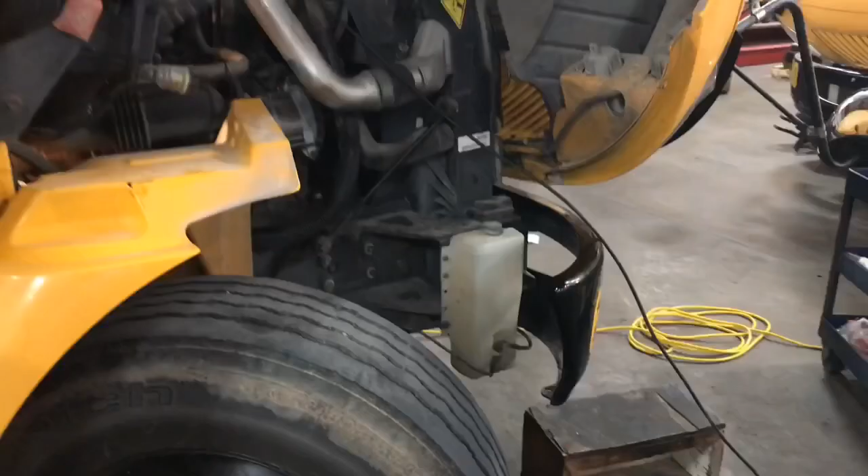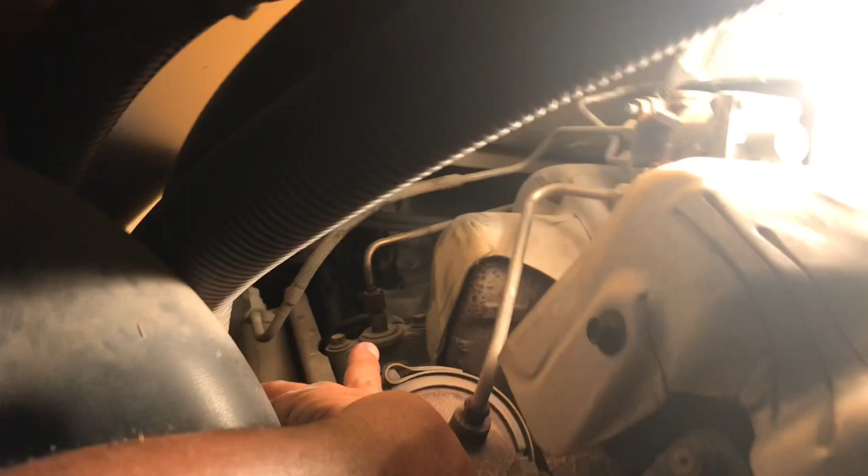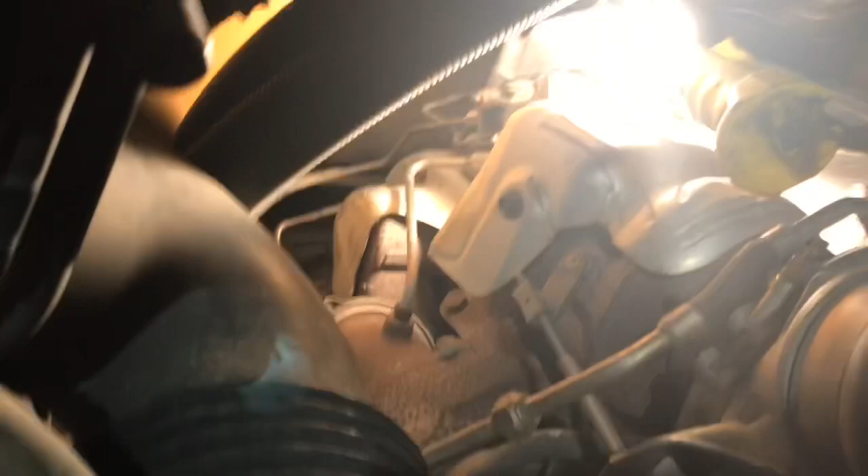Well, guys, this is the unit in question, and this is the 2014 MaxxForce DT, and this down here is the 7th injector. Well, guys, this is the engine that we're having that injector issue with. I can't really show you that well. Let me go ahead and get this air box out of the way. I mean, I can do it without taking that air box, but I want to give you a clearer picture, so let me get that air box out of the way.

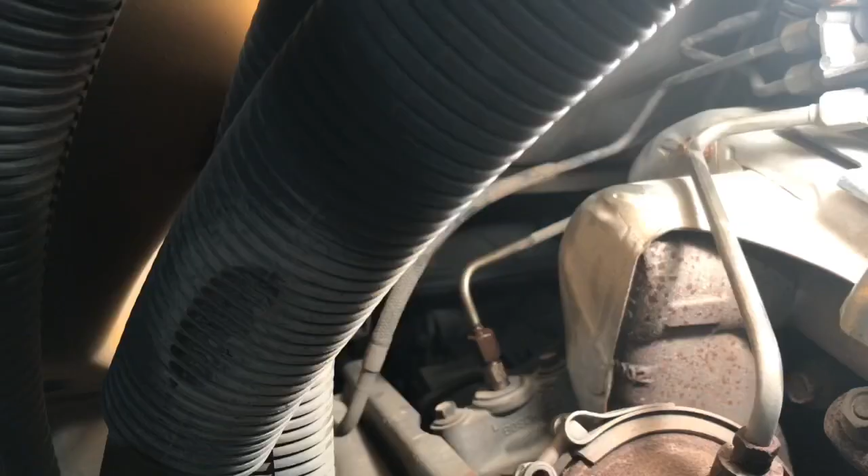Yes, there we go. We've got to go ahead and remove this line. It's a 14mm wrench, and then we'll remove that injector with a 12mm wrench. Once we do that, we'll check and see if this little plate has a carbon buildup in the bottom. If it does, we'll remove this plate, two 10mm, and 2 lines behind it.

You know what? I'm going to show you a trick. You don't have to remove this. If it does have a clog, I'm going to go ahead and clean it up without taking it off, guys. I'll see if I can get the camera in there and show you how they clog up and how I break it apart. So let me go ahead and remove the line and the nozzle. They're on your downpipe right behind that turbo.

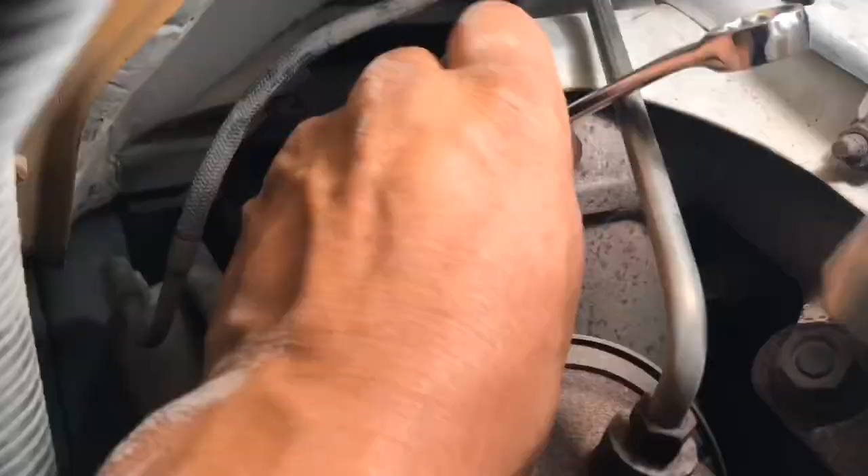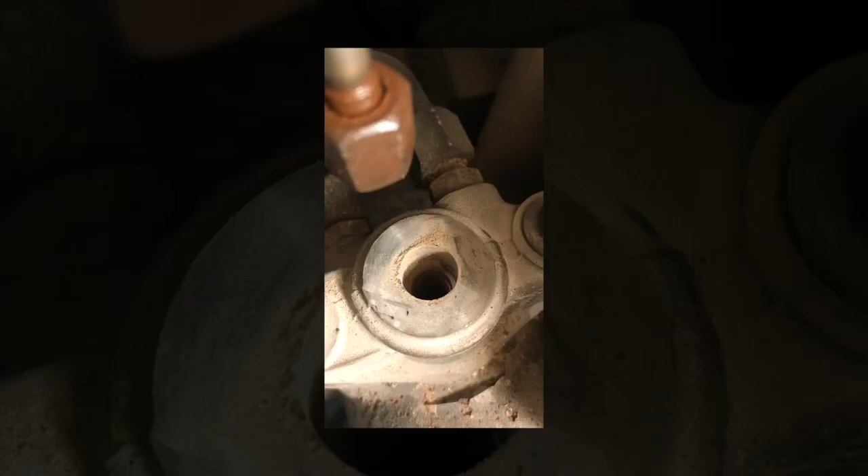Let me see if I can get you a view of that clog or the little carbon cap that I'm talking about. Well, guys, it was a little noisy on that side, so I came over to this side. Hope you guys saw that cap or that carbon deposit.

What I'm going to do now is use a small little screwdriver, and I'm going to poke. Well, you'll see. The screwdriver's not going to go in. I'm going to have to kind of force it a bit, and then it'll just break that little carbon cap, and all I've got to do is clean around it and make sure that I break most of that carbon off. That way, when we actually regen, that injector will spray, and the fuel will somewhat atomize inside that downpipe, and it'll get that DPF filter to the temperature they want it to be at.

So let me show you. It's a little noisy, so I'm going to cut the volume on it, but I'm going to show you in real time how I break that little cap without removing the injector nozzle base. Let me go ahead and get to it.

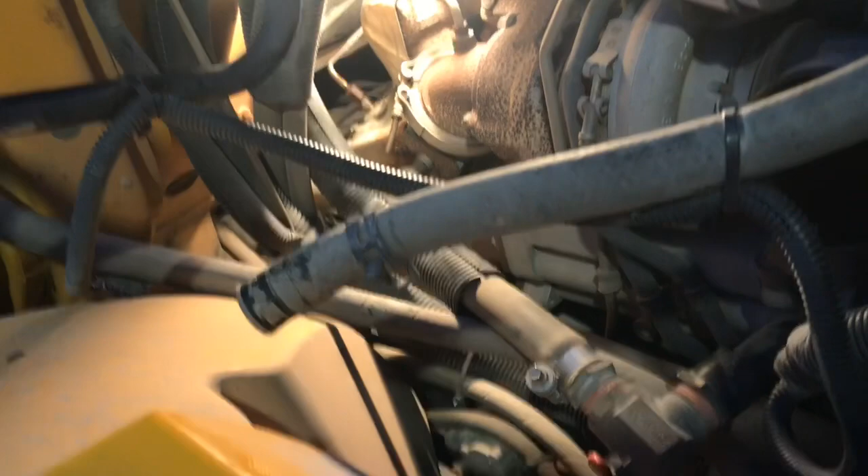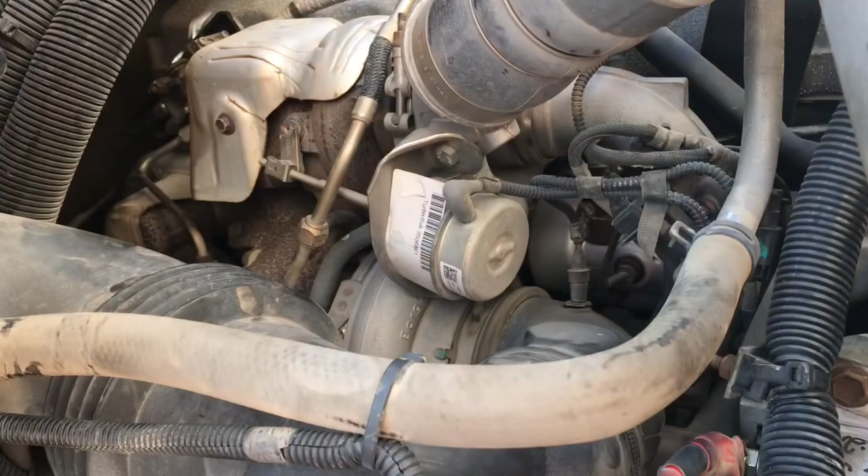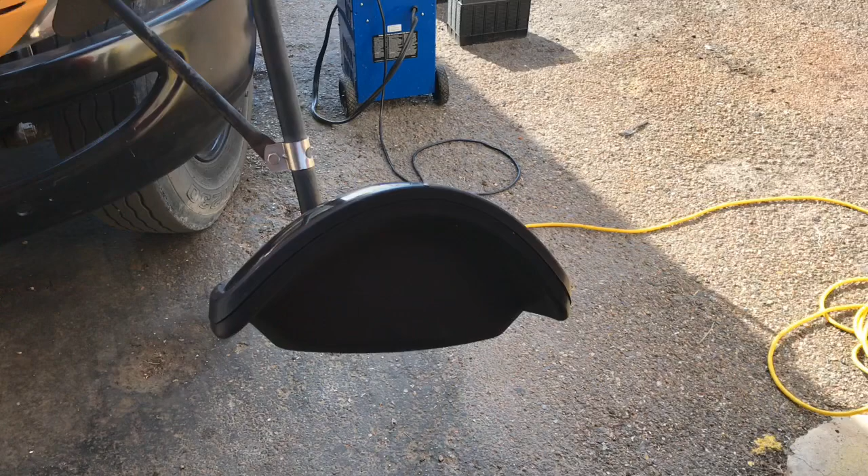There you got it, guys. That's all tight. So let me go ahead and get this air filter back on it and start running that regen. Guys, I have to let the engine run for a little while. The temperature on the engine's got to be over 140 to be able to do a regen on it. So that's why it's running on there.

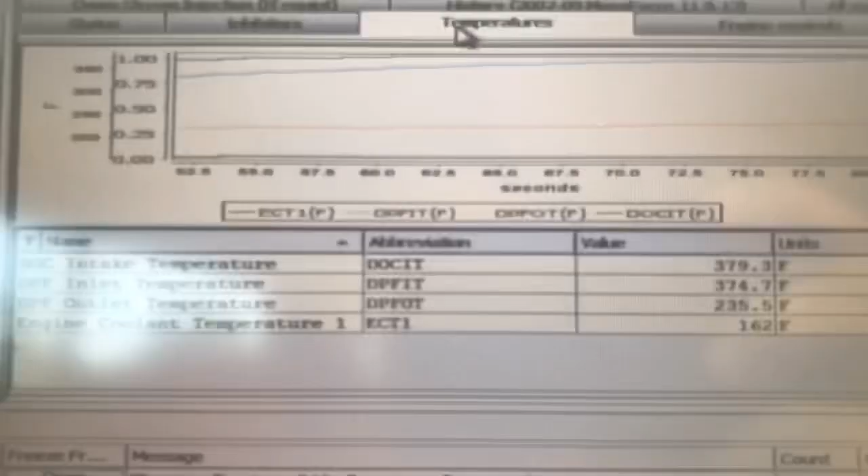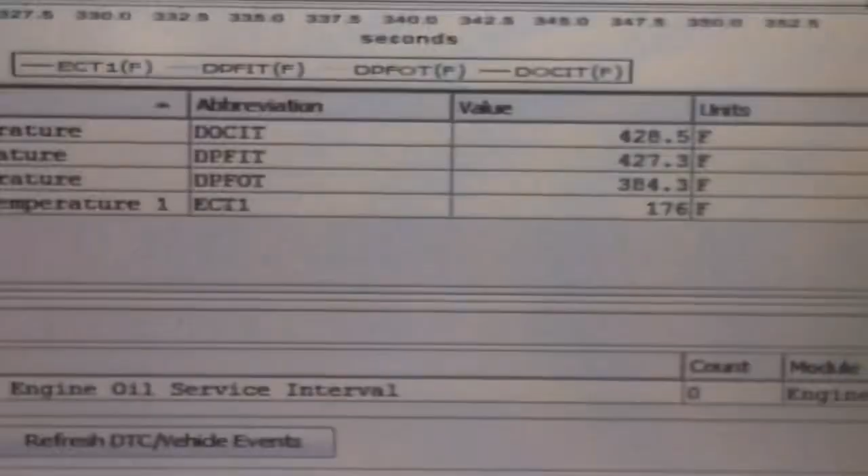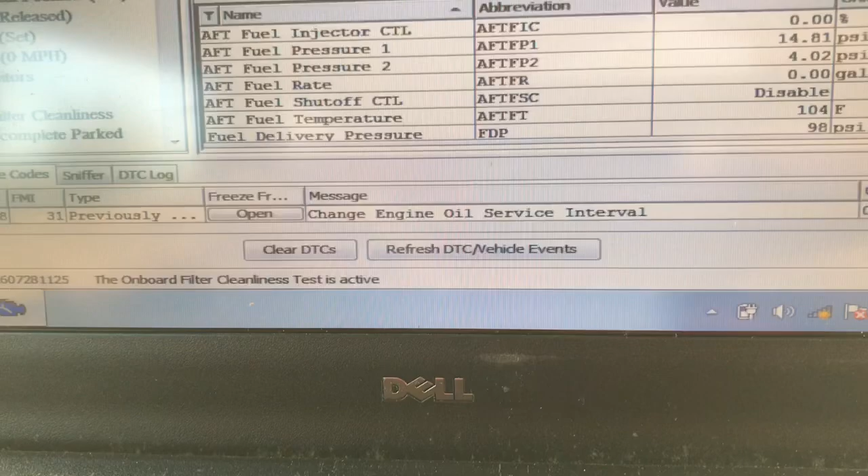Has to hit 500 before the downstream injection begins. So you gotta wait a little bit longer. Temperature is good at 445. We checked the doser injector, it's disabled, and really hasn't done anything. So we have to wait until the temperature rises above 500.

We'll come back to this screen so you guys can see the difference. It'll start using a couple of gallons per hour, and that disable will become enabled. The AFT fuel pressure 1 is going to go to 100 and something, 110, 115. So you'll see a difference. So let me go back to the temperatures.

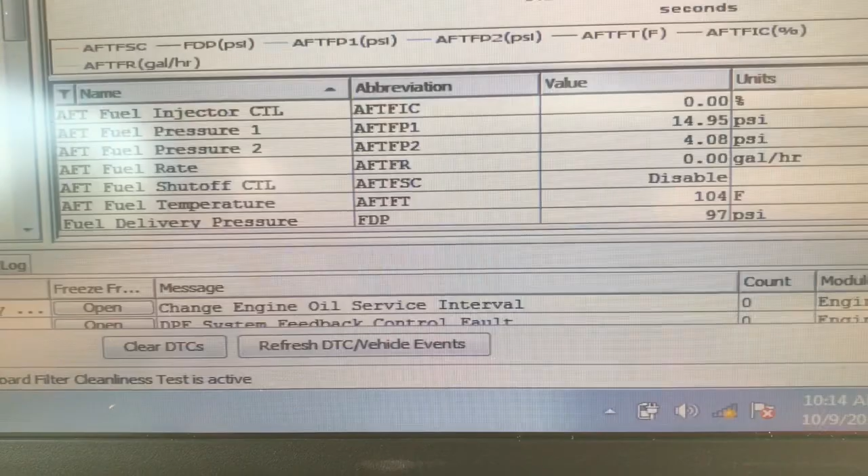Well guys, on this one, this unit is having a little bit of trouble going up on that temperature. It's staying at 455, 456, and it picked up a fault on the DPF system. So on this one guys, I think we're gonna have to replace that little metering valve. Not sure yet, but I'm gonna try it a couple more times. If it doesn't kick in, then I'm gonna stop here, order that metering block, and when we get it, I'll just go ahead and finish this one off.

I hope it is, that way I can show you guys another part for that regen system. So let me go ahead and continue this, and hopefully, well, I hope it doesn't work, so we can see what the metering block does. But if it does, we get it going.

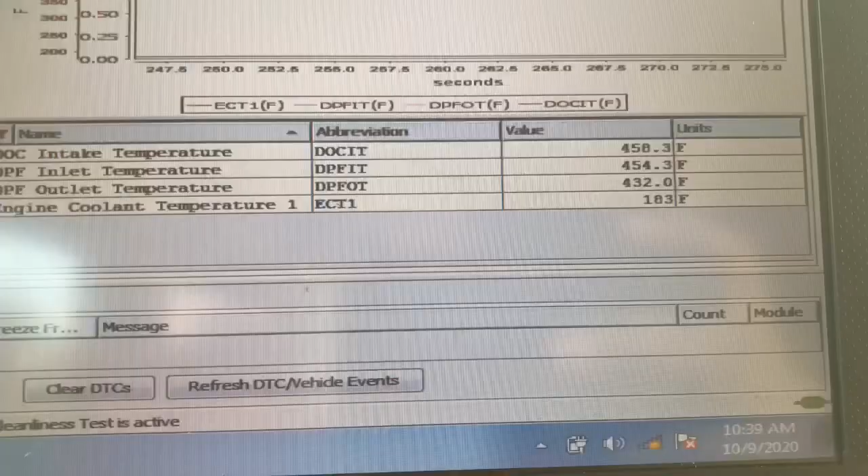Well guys, this one, temperature didn't want to go up. We have a DPF system feedback control fault. I'm gonna have to run a check on this one. I think I already know that it's gonna be that little metering block that's not functioning properly.

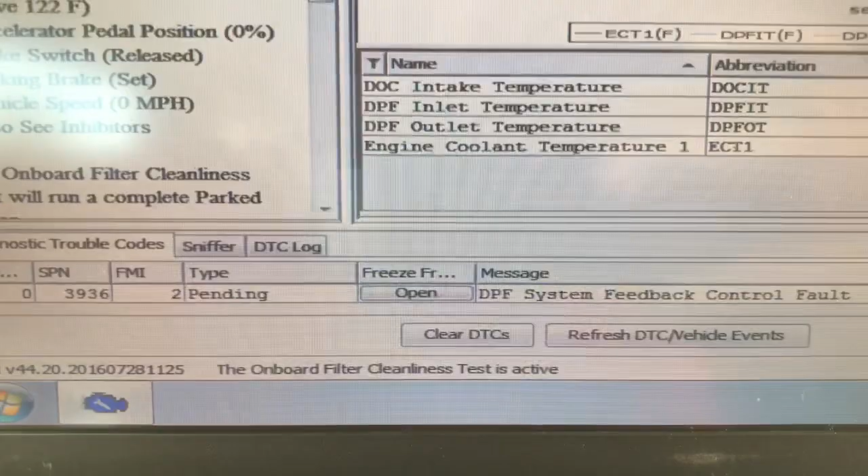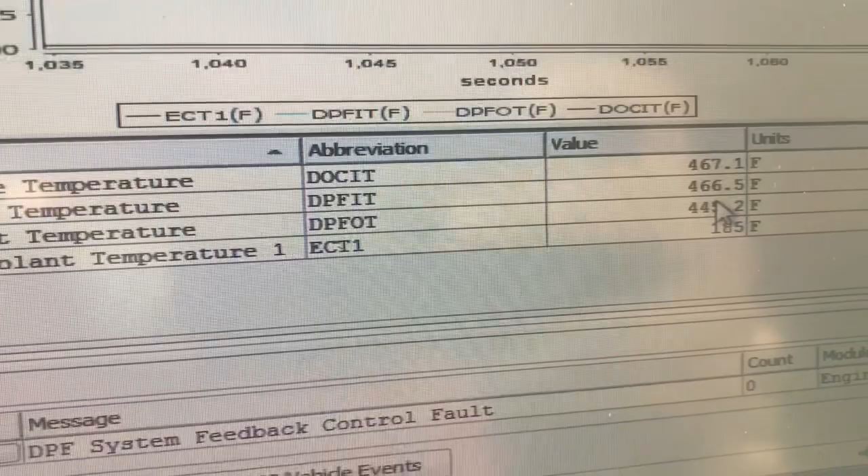When I come back on Tuesday, I got to take those temperature probes out. They're working, I'm just gonna clean off whatever carbon deposits are on there, and I'm gonna see if I can activate that metering block manually with a laptop and see how that functions. If it doesn't work, we're gonna have to order a metering block and get it installed.

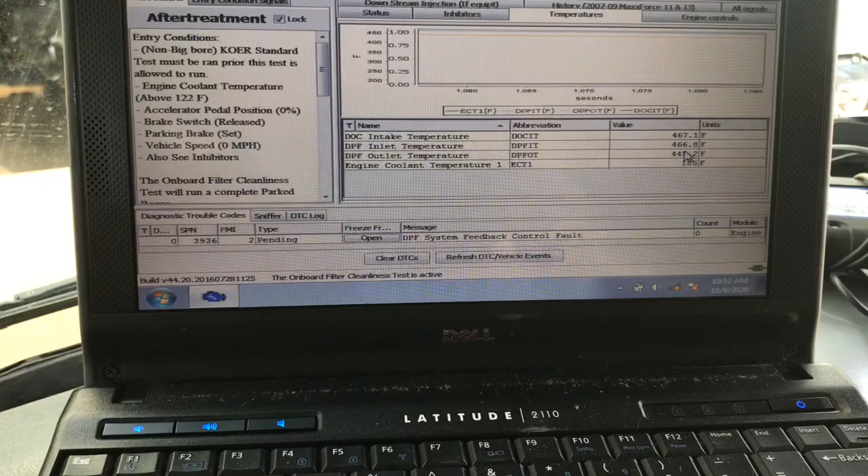So that's gonna be it for this video, guys. I had to show you one that didn't work or that needed more work, so I'll get back to this unit when I get that metering block, and I'll show you guys how to install it, and we'll run this test again and see if that works.